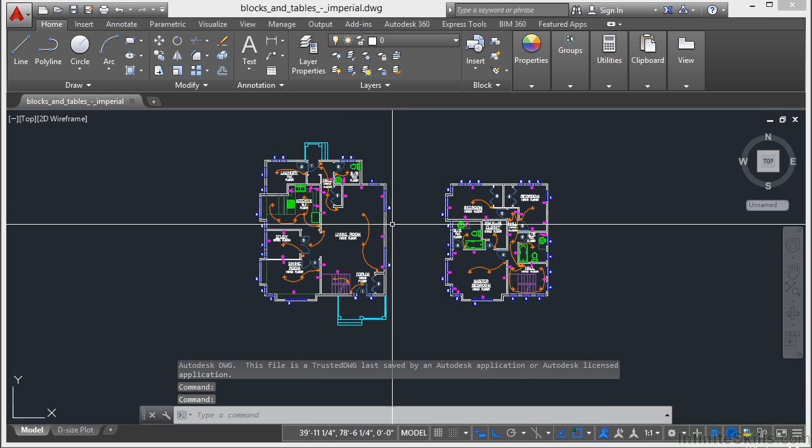Let's open up an example file so we have something to grip edit. Go to this chapter's project folder and open up the Blocks and Tables Imperial file. Now when grips are turned on, you can select the objects that you want to manipulate before entering a command. And you do that by selecting an object. So if I select this arc, I can see that it has 1, 2, 3, 4 different grips. And the grips are those blue boxes.

Now to use a grip mode, you just select the grip just by clicking on it. That turns it into a hot grip. It turns red. When I do that, I'm able to manipulate that object in specific different ways. Right now my ortho is turned on, so it's constraining what I do. Essentially, this is executing the stretch command on the endpoint of this arc. I'm going to turn off my ortho. So you can see here I'm moving that vertex or that endpoint of that arc.

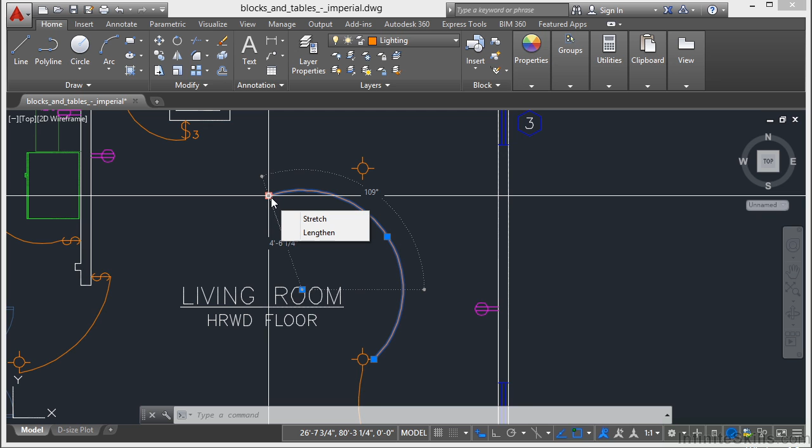Now some grips, most of them in fact, will have different options. If you just hover over the arc, don't click it yet, don't make it a hot grip, just hover over it, you'll get some options. Now on the endpoint of an arc, I have 2, stretch and lengthen. We just saw the stretch, but then the lengthen option allows me to either make the arc longer or shorter. Now I can type in the distance, I can type in an angle, or I can just left click somewhere.

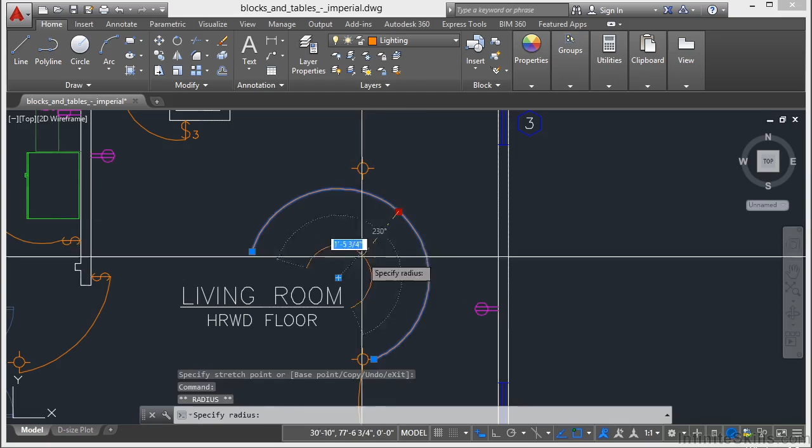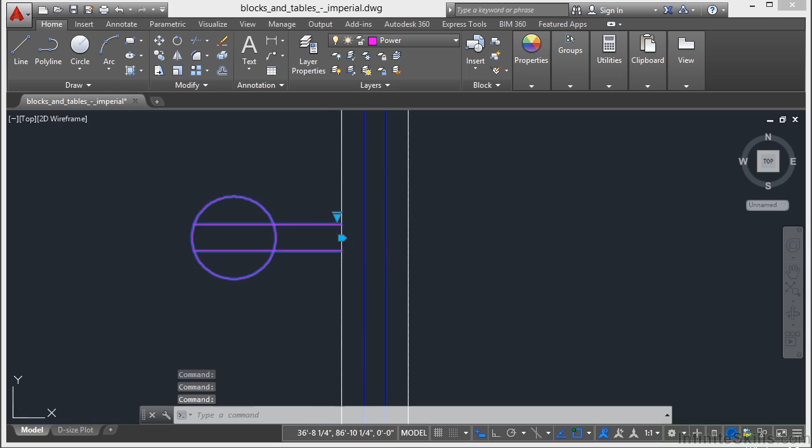Now on the quadrant of an arc, I have 2 options, stretch, which is using the stretch on that midpoint, or radius. Now I'm shrinking the radius and the center point stays the same. Now the center point grip of an arc is just a move command. Now a lot of different objects will have very similar types of grips. This is a block. It has some grips. This is specifically a dynamic block, which allows it to do certain things. That will depend on the block itself.

If I have a line, I select it, I get my hot grips. The endpoints again are just like with the arc. I can stretch it and lengthen it. It's a stretch at the same time there. And then I can do just a lengthen. Shorten it, make it longer. And the midpoint is just the move command again.

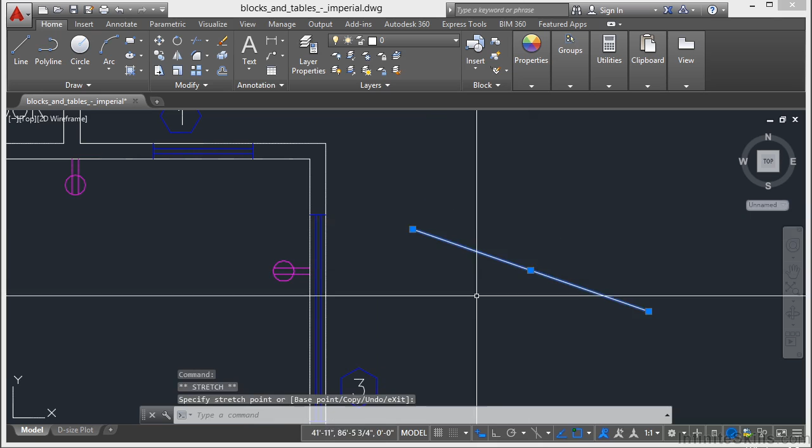Now if I have a circle, there aren't many different types of grips on a circle. I have my quadrant grips, which will just change the radius, or I have my center, which will allow me to move it. Now, different types of objects will have different types of grips, so it's really cool to find out what they are.

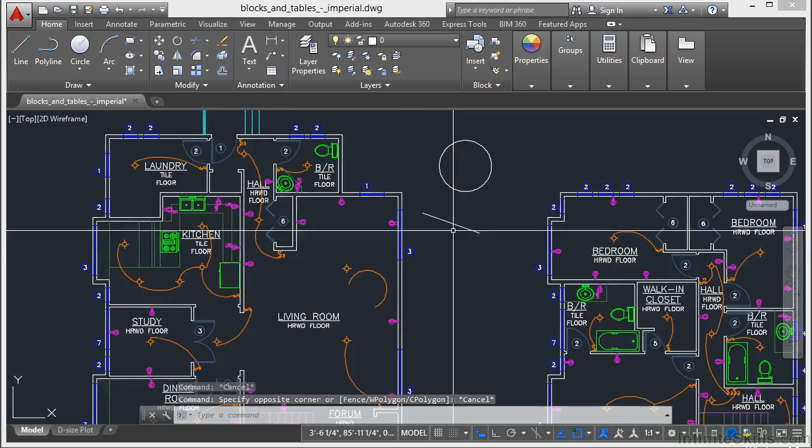Now, you can select multiple grips at a time. So if I select this line, select the midpoint and the endpoint, this becomes a move command, and it's going to keep these relative to each other. It's kind of like still doing just the center point. But if I select another object, and I select by holding down Shift, just that one grip, as well as that grip, I'm changing both of them relative to each other. So I'm changing them both according to how I move it.

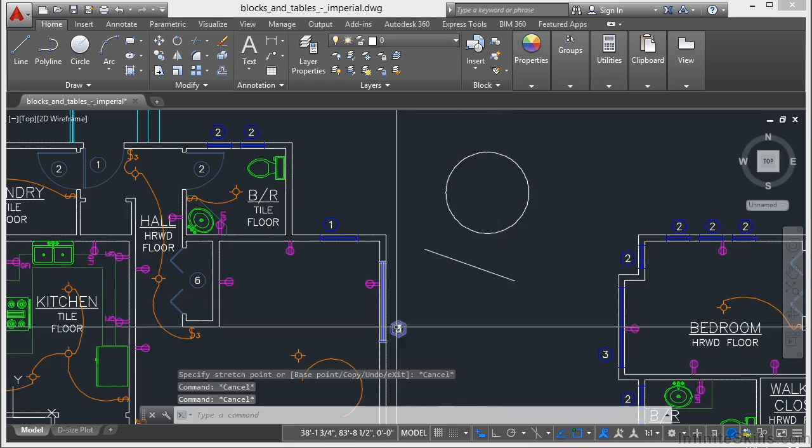So if you need to keep objects like this line right here, you need to keep that same distance apart, you can. You can grip edit multiple objects at a time. So keep that in mind as something you might want to do. Hold down the Shift key first, select your grips, and then you can move both items accordingly.